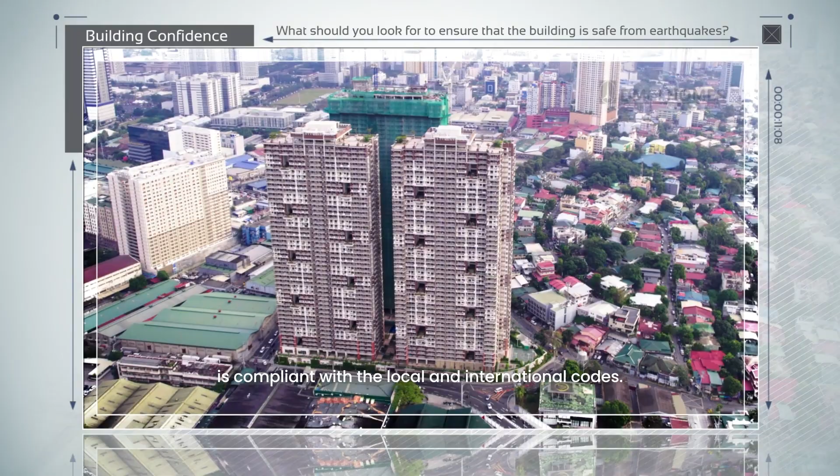The buyer should ensure that the property is designed by a reputable licensed structural engineer, and at the same time, dapat built din siya ng isang experienced and licensed property developer to guarantee that the structure is compliant with the local and international code. How high is the magnitude yung kaya ng residential building?

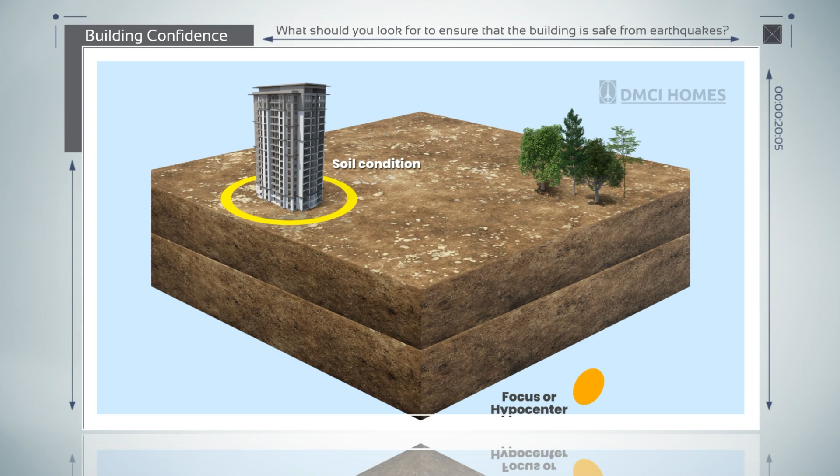What's the National Building Code of the Philippines? That's PD 1096. Up to now, it's still the prevailing national code of the Philippines. Yung purpose of the National Building Code, number one, is to safeguard life, property, yung personal wellness ng mga tao. And of course, to provide yung minimum requirements for us to be able to regulate and control yung design.

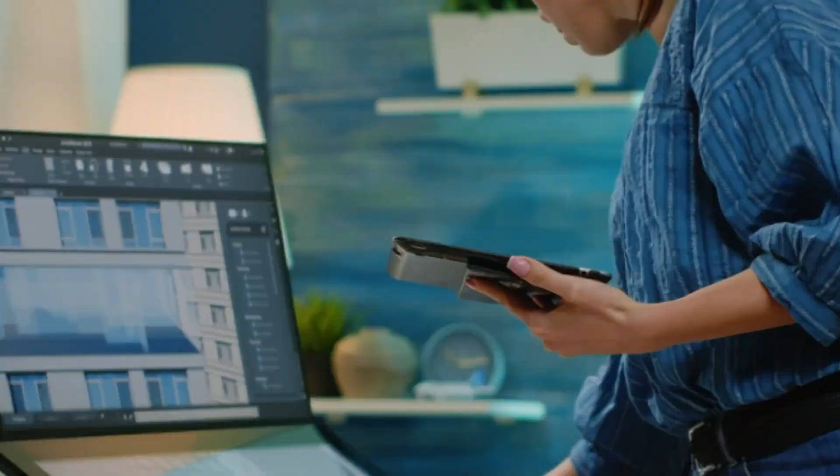What is the difference between the NBCP and NSCP? Yung National Building Code embraces everything. May maliit na part doon about the structural, the NSCP. The NSCP is the main referral code used in structural design of a building and even on vertical structures here in the Philippines. It contains provision to seismic resistant structures.

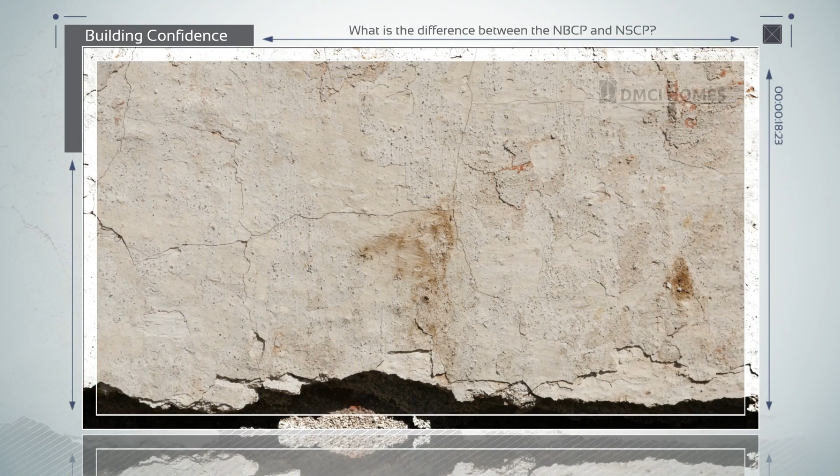It does not mean na zero damage yung mangyayari once na ma-hit siya ng earthquake. So the NSCP anticipates that under severe earthquake, structural damages may occur, but these damages should not lose life and property. So yung seismic resistant design, it is not applied to all members or components ng isang structure. It is basically applied to select members that act as part of the main lateral resisting system ng isang structure.

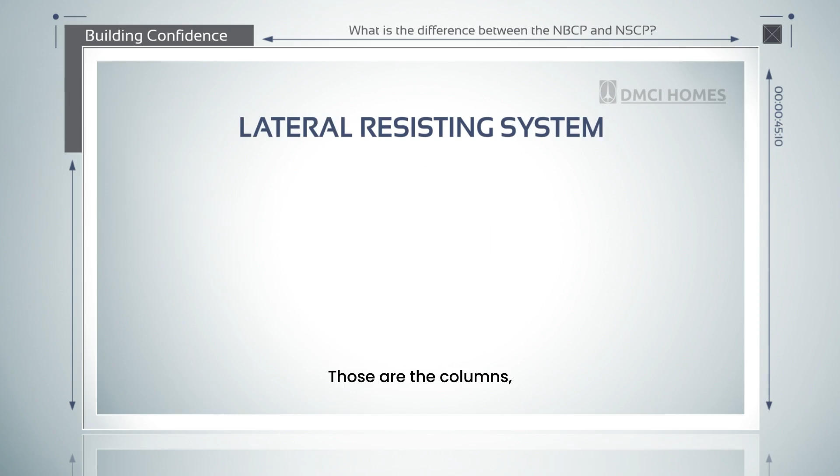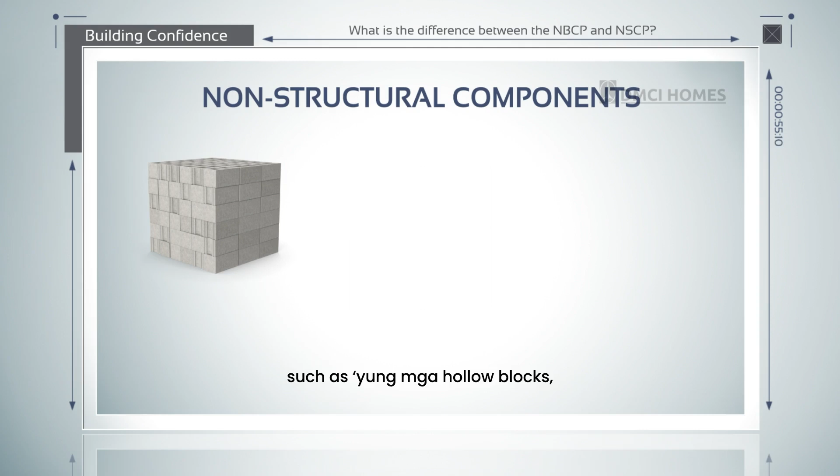Ano ba yung mga lateral resisting system? So those are the columns, shear walls, beams, girders, and slabs. The non-structural components, such as yung mga hollow blocks, yung mga partitions, yung mga ceilings, yung mga floor and wall tiles, glass windows, and other similar building components, hindi siya part ng lateral resisting system. So therefore, they are not earthquake resistant.

Then we start off with looking at the architectural plans. That's very important that we get the geotechnical investigation or soil report early. Pag yung structural system na yon is one of those listed in the NSCP, then pwede kami to just use yung tinatawag nilang prescriptive based design. Linear analysis lang yun. If it doesn't fall under those listed in the code, then we have to do non-linear analysis. Dun pumapasok naman yung PBD.

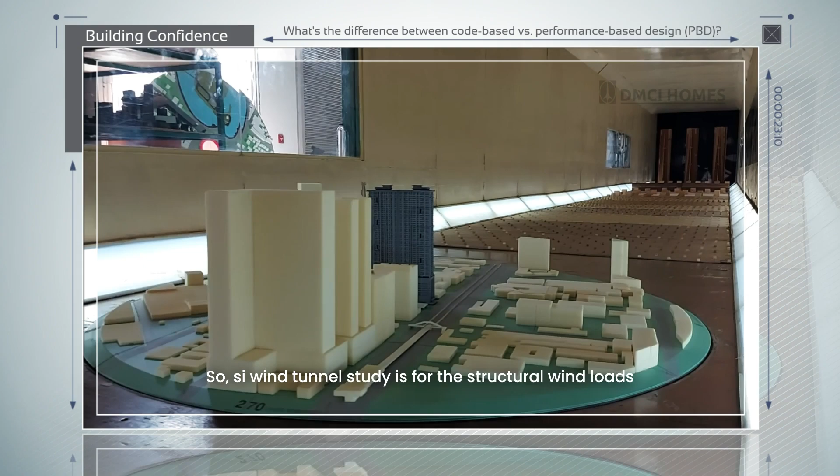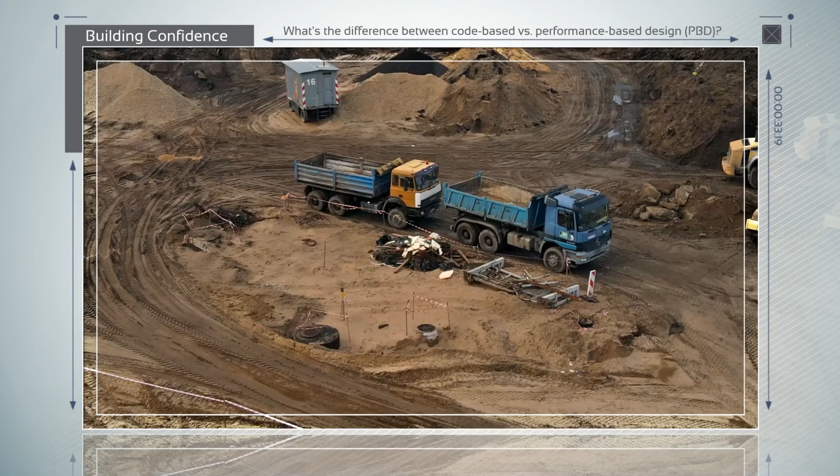Why do we talk to consultants? Our consultants and partners are not only renowned in the industry, but they also have valid licenses and maintain a good standing membership dun sa Philippine Institute of Civil Engineers, Association of Structural Engineers of the Philippines, the Institution of Specialist Structural Engineers of the Philippines. Ma-ensure natin na kapag yung consultant natin is part ng mga credible organizations na yon, they will bring a high level of expertise and credibility.

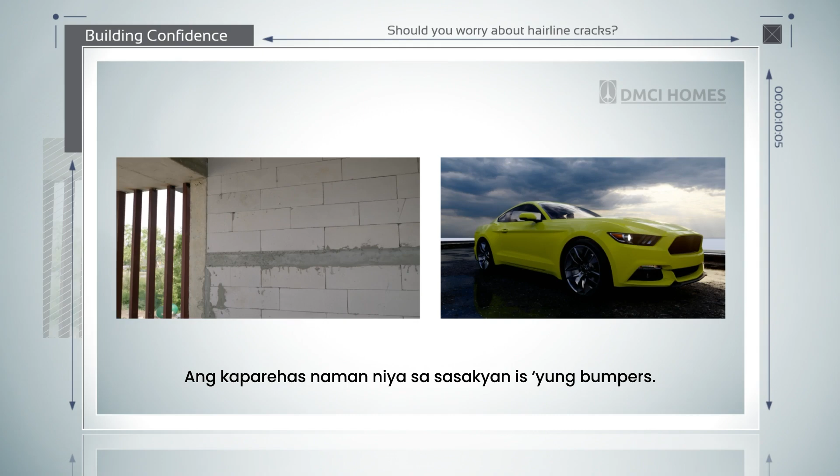How do engineers make sure that the building is safe for occupancy after an earthquake? After a strong earthquake event, the structural elements of the building are inspected by a licensed structural engineer or a qualified structural engineer to decide whether kung pwede ba siyang i-occupy pa or magkaroon siya ng restriction for occupancy. In the event na nabanggit ni structural engineer na kailangan siyang lagyan ng occupancy restrictions, dun yung time na kailangang i-retrofit or bigyan ng strengthening yung building if nakitaan dun sa analysis niya na kailangan.

From a structural engineer's view, how safe are DMCI Homes condominiums? DMCI Homes is a very responsible company. Based on our dealing with them, we've been with them for 14 years already. And so far, they also listen to us, their consultants, on structural matters. And we appreciate that.

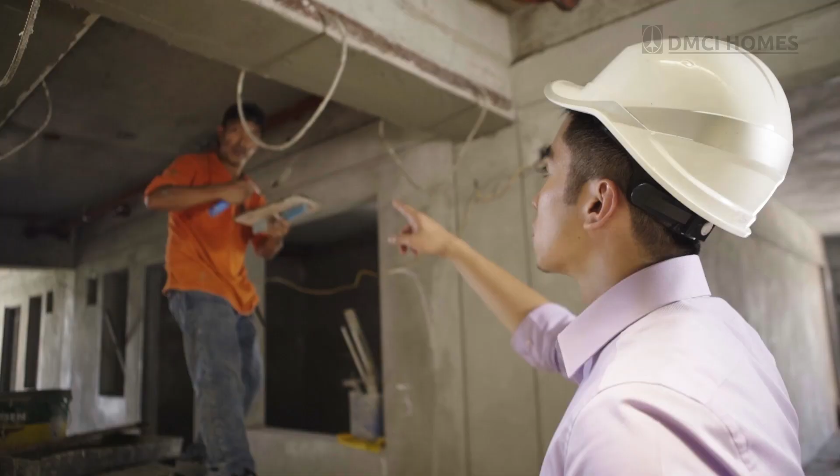DMCI Homes strictly follows the prevailing building and design codes. Key factors that make DMCI Homes condominiums safer are solid foundations, flexible designs, and high-quality materials. These elements work together to help buildings absorb and withstand the shock of an earthquake. After an earthquake occurs, thorough inspections are conducted to ensure that the buildings are safe for occupancy. This process can be thought of as a comprehensive health check for the structure.

Quality and safety are highly prioritized in DMCI Homes. Built with meticulous planning and adherence to strict codes, our buildings are designed to be safe against earthquakes and other natural calamities.